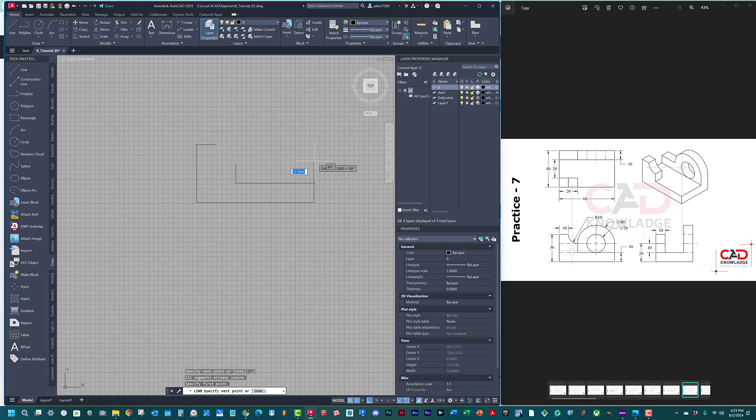And then I can go up 10. 10 here. And, oops. I'm going to hit escape, and I also need to do 10 at the other end. So line, 10. Okay, so it looks like we're so far so good.

I think now we need to do the first bigger circle, which is radius. It says diameter when they have a slash through here like this. That means diameter, and then if it says R, that means radius. So radius is half the width of the circle, and the diameter is the whole length of the circle. So let's take a look at how we're going to do that.

So as I said before, it's important to use temporary lines, and eventually I'll show you how to use construction lines, which is actually up here. But like I said, these are lines. You could always draw more lines than you need and just erase the ones you don't. So just a mindset. It doesn't matter how you get there, it's how you end there.

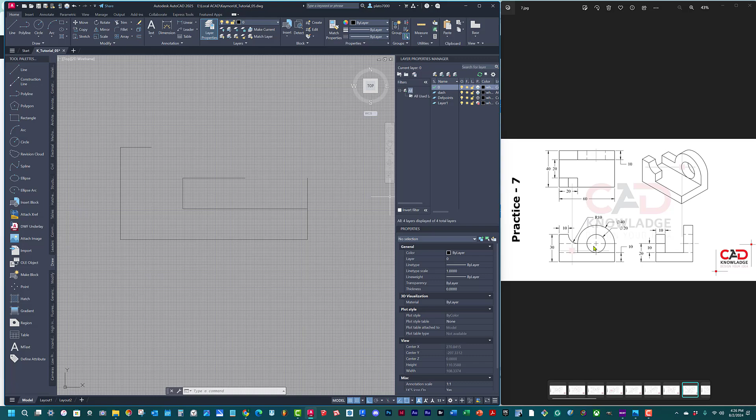So in order to find the center of that circle, since I know this width between here is 40, and I know the circle's 20, I need to get halfway on that line in order to find the middle, and I can do that by going 20 in this direction. Escape. So now that I've done that, if you look at my arrow pointing at the drawing, I know where the center of this is because it's halfway between that 40. So it's 20 over, and that's it.

And then all I got to do is draw a circle from there, and I don't even have to put the dimension in because I'm just going to go right to the edge like this, and you could see where it says 20, and you could just hit enter. Well, actually, you could just click right at the end because 20 just clicked. So now we should be able to get rid of.

So now we should be able to just go to our modify on our palette on the left, and then we should be able to trim using the trim command, and then we should be able to get rid of some of the circle we don't need. So again, you can always draw more than you need and then end up with less in the long run. So it looks like we're pretty good there.

So now we have to draw the inner circle. And on here, if you look to the right, it says it's 20-inch diameter, so it's a 10-inch radius, but it's also the same circle as before. So I'm going to go back to my draw command. I'm going to draw a circle, and then I'm going to draw that at 10 because half of 20 is 10. So I can just type in 10. And that should give us a circle like that.

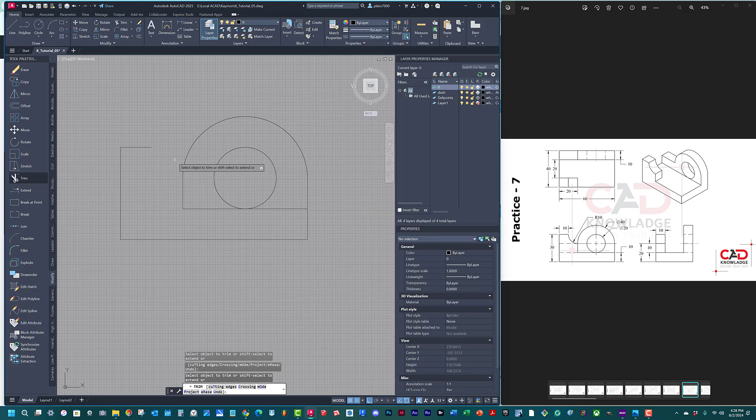the next thing we want to do is this curve, this radius curve. So the radius curve, we can do this a couple of ways, but probably the best way is I would put some additional lines in there just to help us out. So we're going to add some lines there. And we're going to go down 10, and then we're going to go over 10, then we're going to go up 10. And we're going to do that.

So this 10, the top of this line, is where the radius is going to start, because I'm going to draw a circle starting from that point, and I'm just going to go until it hits 10. You can see how it actually intersects both the top corner and the bottom corner. So you can see why I drew those other lines in.

So now I'm going to go back to modify, and I'm going to get rid of some of these. So I'm going to trim, and I'm going to get rid of this top part. Don't need that. Don't need this part. Don't need this anymore. Don't need this anymore. And don't need this anymore. So I'll let you put in the dashed lines yourself. I showed you how to use dashed lines before.

So now we're going to draw the top piece. And remember what I said is that you can, we're going to go back to draw here, draw temporary lines to line up everything, because you use the bottom drawing to create the side drawing and the top drawing. So I'm just going to draw a line from that corner up, and I'm going to draw a line from this corner. Because we can always trim them, get rid of them. Going to inference that so that green line tells me it's there.

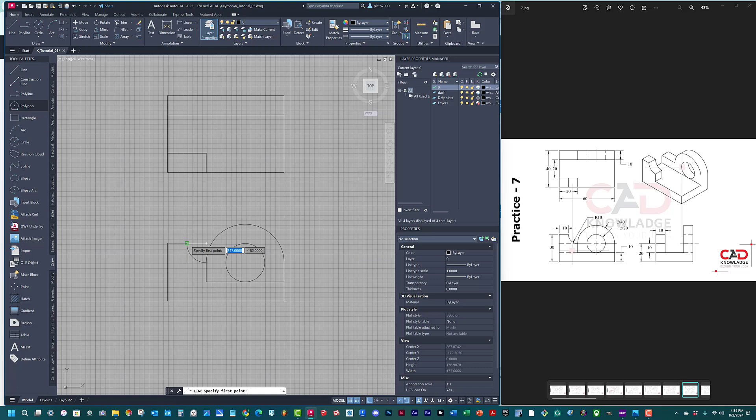Now, you could see, where does that next line go in here, the one that goes vertical? Well, you can actually remember, if we go back down to that curve and we bring that line all the way up, that's where that line goes. It's actually 10 plus 10. So now we can go back and trim that off, since we don't need that whole line.

So now we have that piece in there. If you also notice, the line in the back is actually lined up with this corner edge here, so we can actually create another line. You could go in and take your pencil and mark up all the missing dimensions that you don't see. That's what I recommend: there's a lot of numbers that seem to be missing, but you can pencil those in on paper, and then once you start drawing it, you'll know exactly where they belong.

So I'm going to go ahead and draw a line straight up from there till I get to the top. Hit escape, and then I can trim off some of that again. Go to modify and trim off. Sometimes these things are a little tricky. Trim that off, and that takes care of that one. And there's some more dotted lines in there. I'll show you how to do that.

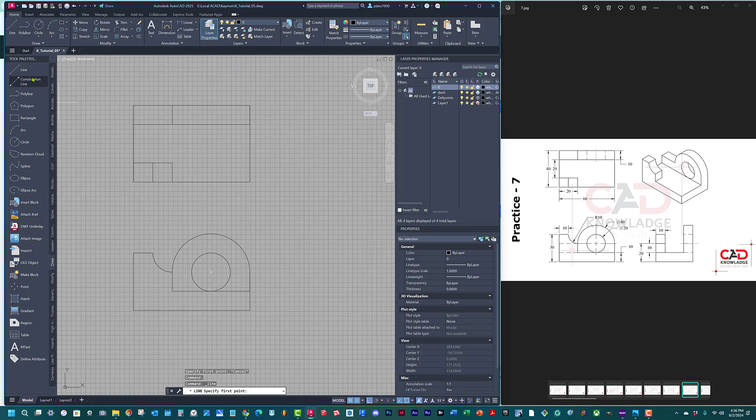So I think we've actually finished the top piece. Yeah, that's it for the top. We're just missing the dotted lines, so let's go ahead and put some of those in. One of the ways I would do that is, I know that the inner circle is a dashed line, what I called before a hidden edge line. So if we go back and draw a line, first of all, I think we'll draw the center line, and then we'll draw a line from the inner part of the circle.

We want to draw a line that's horizontal, so we know where the tangent point is there. And then we're going to go backwards like that. That's going to tell us a lot, and you'll see right here. So now that means that line goes all the way up there, and that line goes all the way up there. So now let's go to modify. I'm going to show you a new command too. We're going to trim off this piece, and this piece, and this piece. So we don't need those.

All right, so now we're going to use this other command called break, and I haven't used this in a long time, so we'll see what happens. So if I hit the line break, you can see what it does is start to detach the line like that. So to get a dashed line, we're going to do this really carefully. Hit break. And we hit another break. Break. There you go, like that. So that's how you get that dashed line.

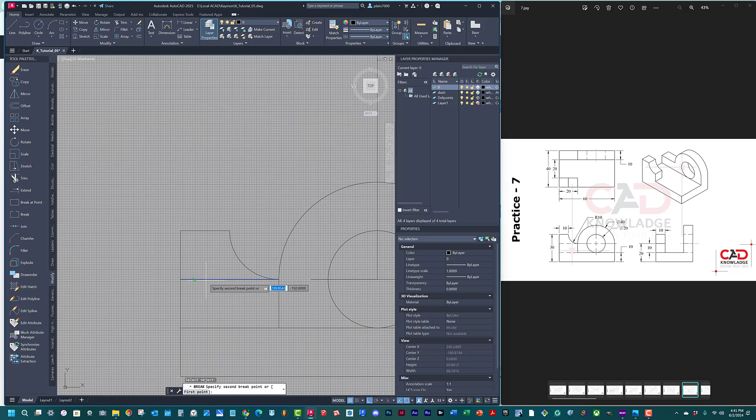There it goes. There it is. Break. You have to hit break each time. There it is right there. Okay, now what I can do, oh, we got to do this for the one below. So let's break.

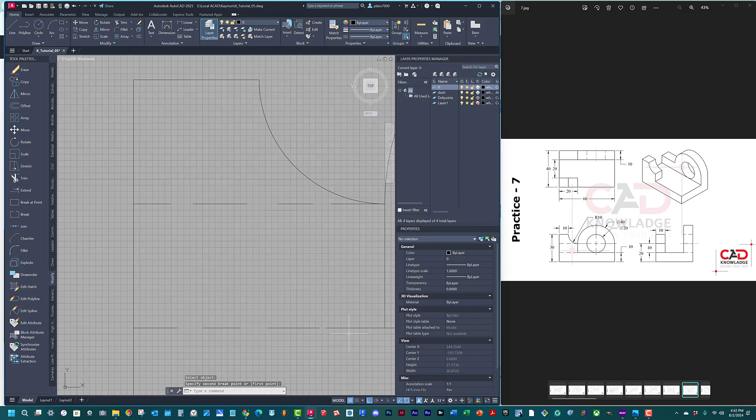Yeah, sometimes you have to zoom in more. So we're going to hit break again. Hit break again. There you go. That's good enough. So now we have that, all that done.

Now let's do the side piece. So I know that this line, I'm going to need this line to go sideways. And some of the lines I already know. So I know that line, I need that line. I'm going to inference the bottom of that. And I know that line's going to come down somewhere, so I guess we could start here. And that's 10. We know that's 10.

So to go all the way to the top of the circle, we really need to go up the same as this length here. So if you find yourself right at the top of that circle and you drew a line all the way across and inference down to the end here, oops, let's do this again, and go all the way across, inference down to the line, see the green line, then hit that, and then come down, then we have the back edge. So this is a way to draw without always putting the dimensions, because everything is related to each other. You just have to find where it's related.

All right, so now I just need to come over 10. Okay, I need to come over 10. And that takes care of that piece. All right, then the side of the piece, if you look up at the top, it's 40 wide. So that's how wide this piece is, because if you turn the piece around like that, that's what it would look like.

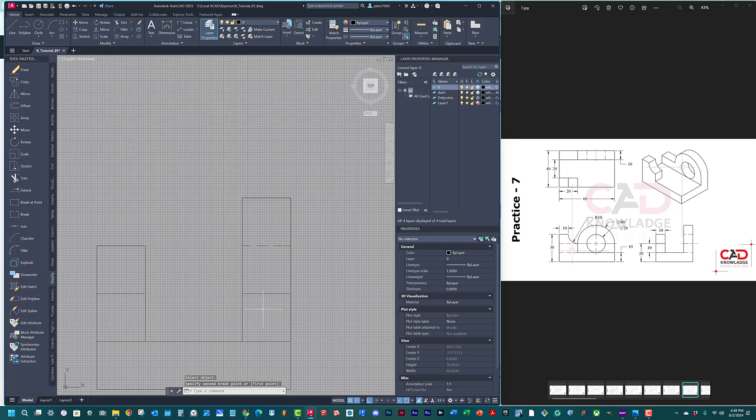Okay, this is actually better with the grid line on. Let's see if this works better this way. Yeah, you got to fool around with this. Break. Yeah, I guess you leave the grid on because it'll stop at each one of those spaces. Okay, and then the one at the bottom is the same. We have to zoom in.

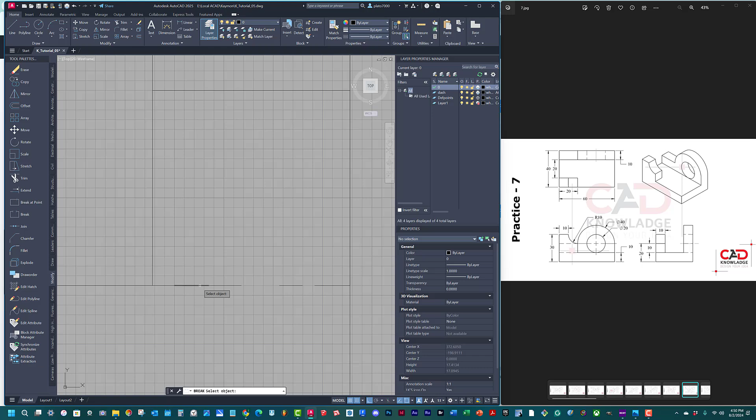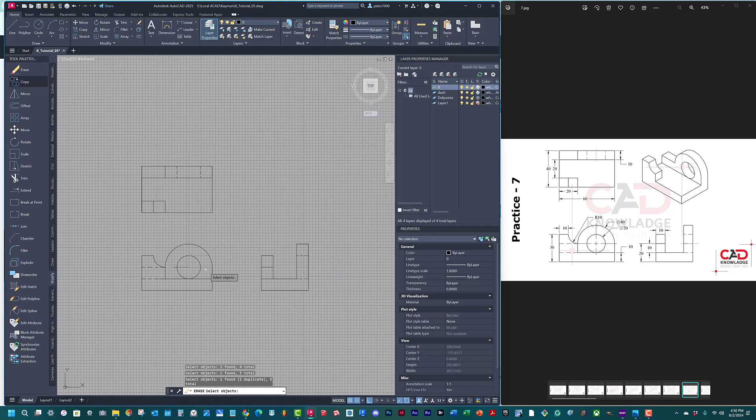Alright, that's good enough. So this one in the middle is a center line, we call it. I'm going to show you how to use center line. So for now, we're just going to delete it, and I'll have to show you how to create a center line using your layers command and everything like that. So we don't need that one. We don't need that anymore. We don't need that or that or that. So that's it. We got it.

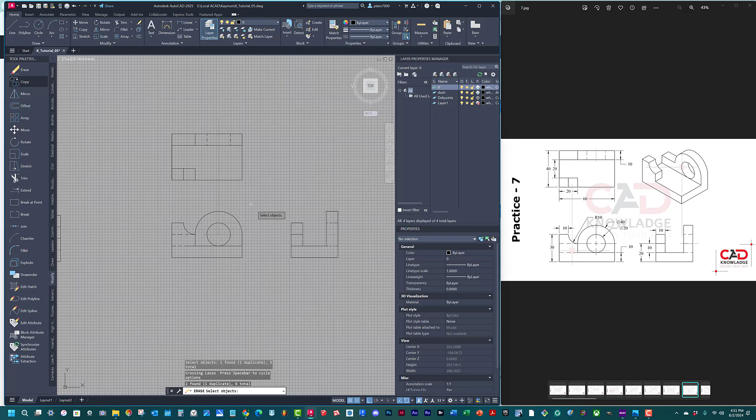So that'll get us through, and then I'll start showing you more about layers and how to create line types, and then we'll go from there. So your next assignment, I'll email you and let you know which ones. This one is actually number 7, so we've already done number 7. So I'll let you know what the next one is. So you'll have this one, and then you'll have this one, and then we'll be good to go.